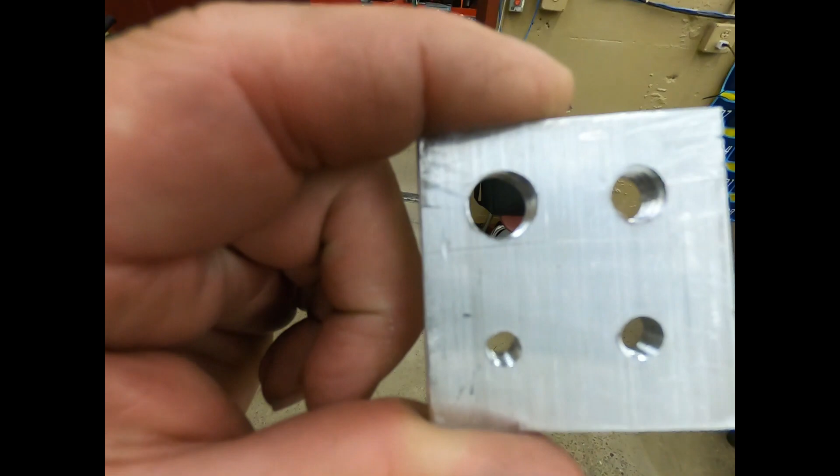You're going to put in a 1/4 inch bolt, a 5/16 bolt, a 3/8 bolt, and a 1/2 inch bolt. So the project, when it's done, will look like this. Just looks like an ordinary aluminum block, which it is. It's approximately a 1/4 inch, maybe 3/8 thick, with 4 holes, which you will be drilling, tapping, and putting threads in.

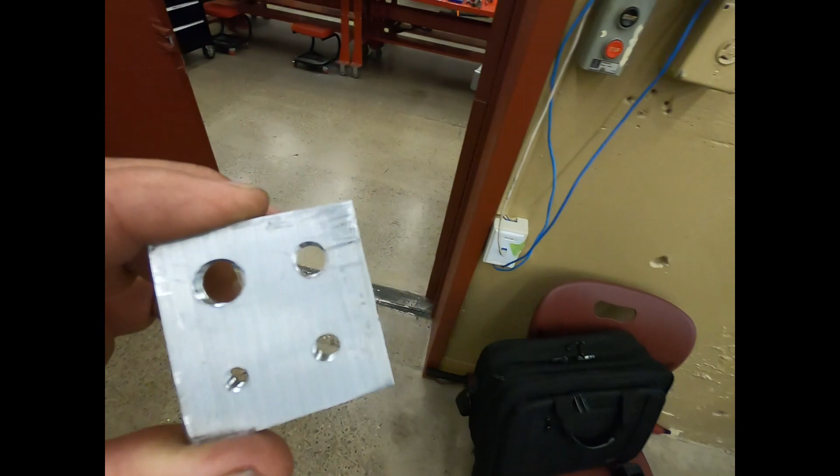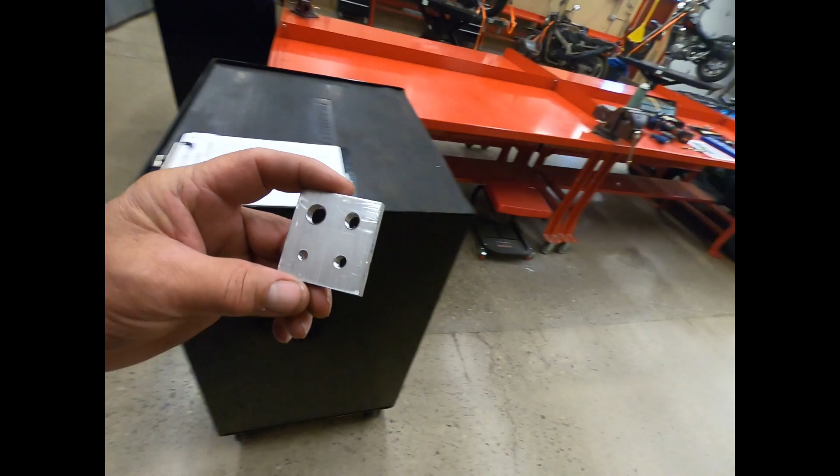It comes from a piece of flat stock, which you'll have to cut, which is right here. You'll be cutting it, shaping it, and making it look like this in the end. Now, we'll take a walk out here to the shop, and I'm going to show you the tools of the trade, the tools which you will need.

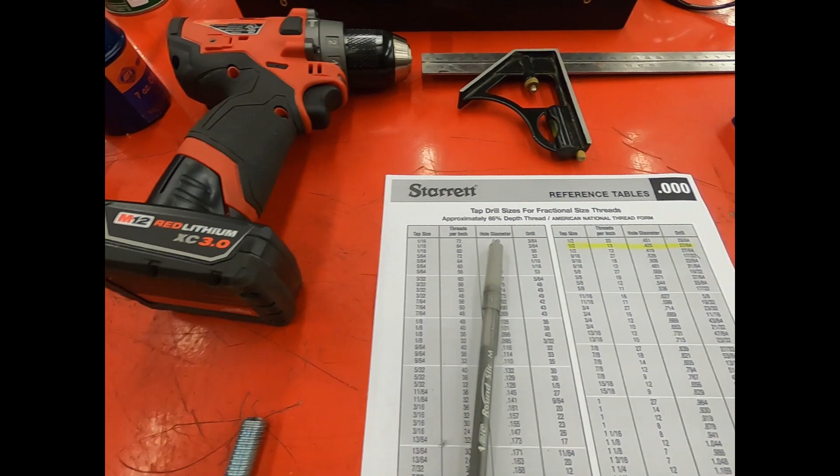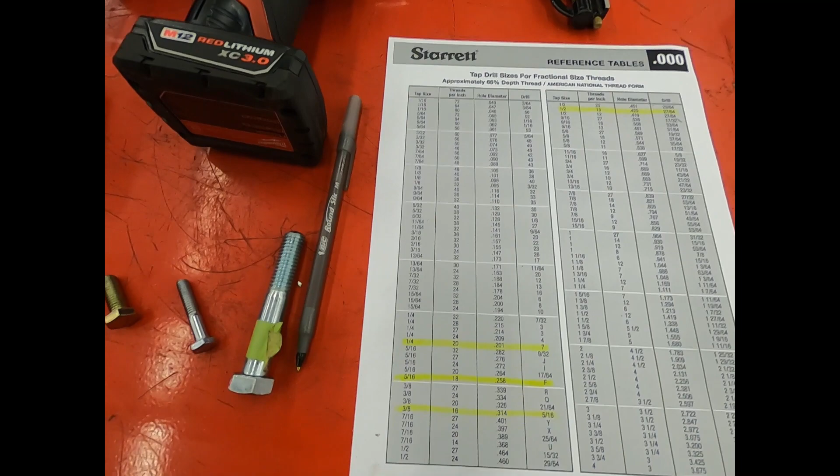Number 1 is going to be this reference table by Starrett, who happens to be one of the leading manufacturers in precision measuring equipment, drills, taps, dies. And you'll notice that a couple of these dimensions are highlighted. These are the sizes that you will be making your holes to.

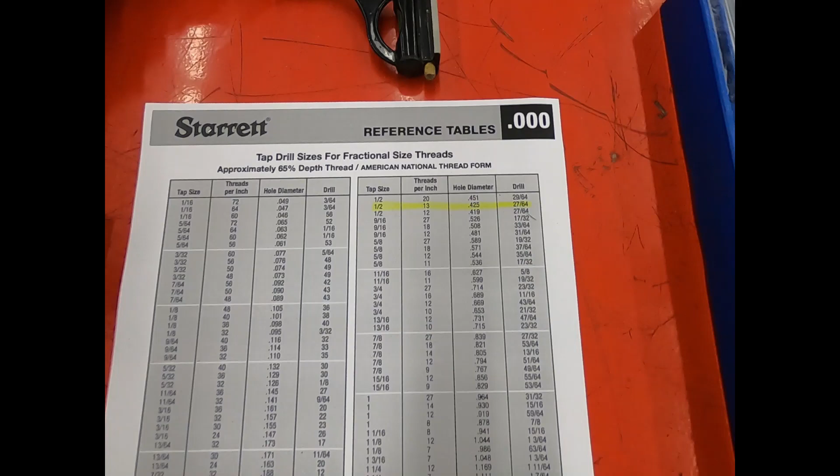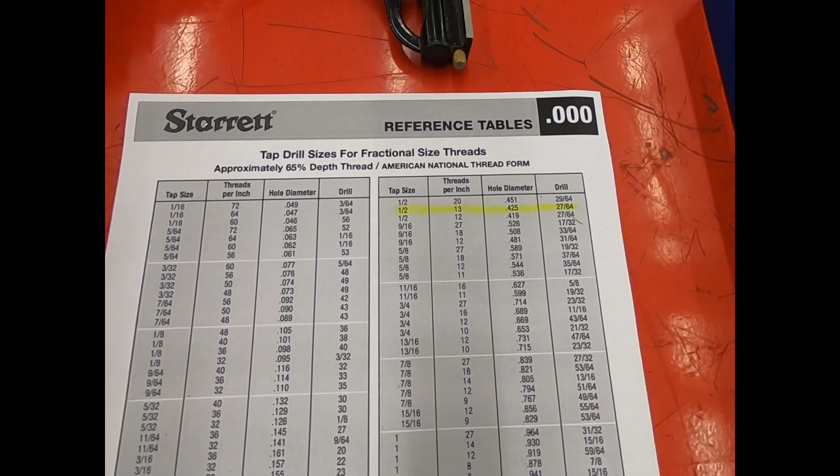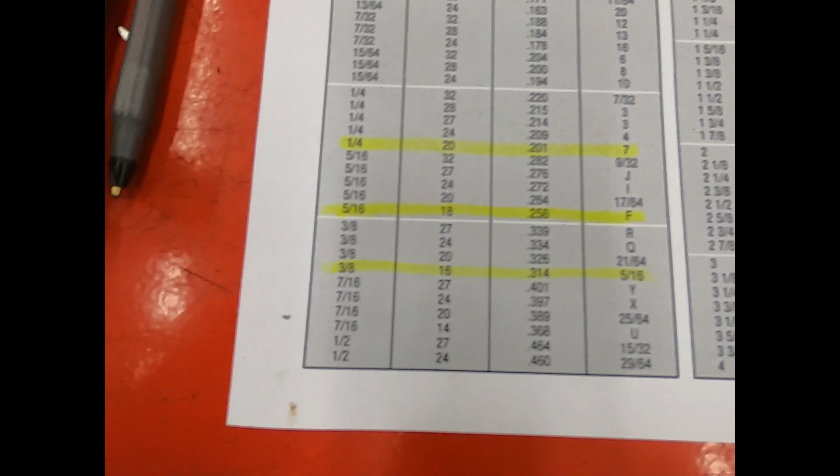Okay, there's your 1/4 20. There's your 3/8 16, 5/16 18, and 1/2 inch 13. This chart gives you not only the bolt size in the first column, or the tap size, the threads per inch, and also the drill size which you will need.

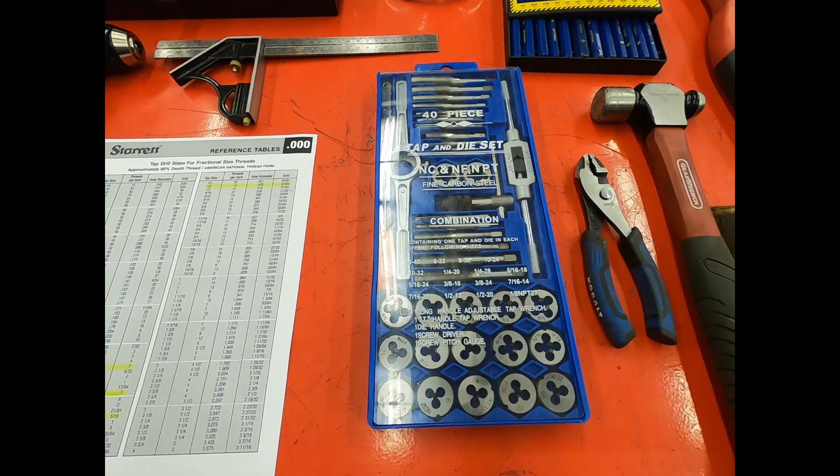This right here is our SAE tap and die set. Now you have to be careful because there's SAE and there's metric. So the question is, how do you know? Well, for one, they have the NC/NF NPT, and all the taps and dies will be fractional. If this were a metric set, they would be in millimeters.

We're going to need some basic hand tools. A pair of pliers is good to have. A hammer. This other device right beside it is called a file card. You'll see later in the video how we use a file card to clean the file, because when we're filing aluminum, the file will get all full of debris.

Okay? Probably should have put the file over there with the file card so that you know that they kind of go hand in hand. But that is your flat file, and immediately to your left will be the file card for cleaning it. If you don't have a file card, you can use a wire brush. Wire brush works pretty good. This is a center punch and chisel set. You will be needing the center punch, which is on the far left, this little one.

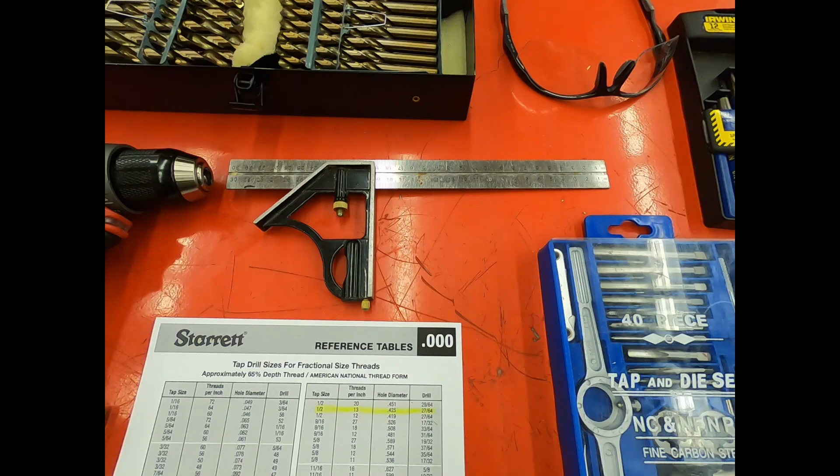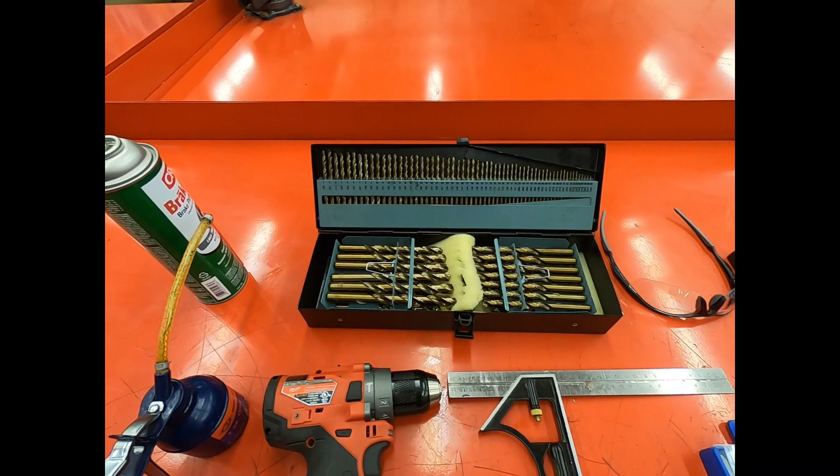Okay. Our hammer. We're going to need a combination square. That's going to be so that you can check and verify that you have good square corners. It also works as a good straight edge. Just overall handy tool. We have a 115 piece drill set. Covers every drill you should need for this job. And we're not going to make you drill them by hand. There's an actual battery powered drill

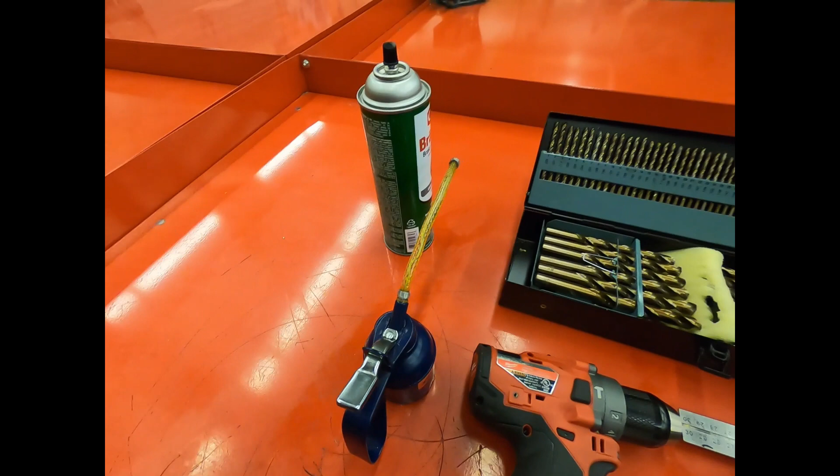to help you out. We also have oil. We're going to need oil for lubricating the threads while we're cutting our threads into the aluminum. I keep a can of brake clean handy in case I need to clean the oil off when I'm all done. And of course we have our 4 bolts that we're going to use for this project.

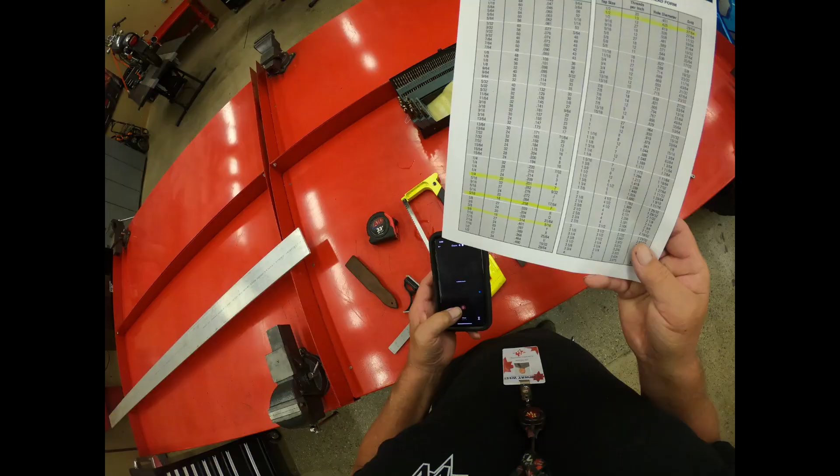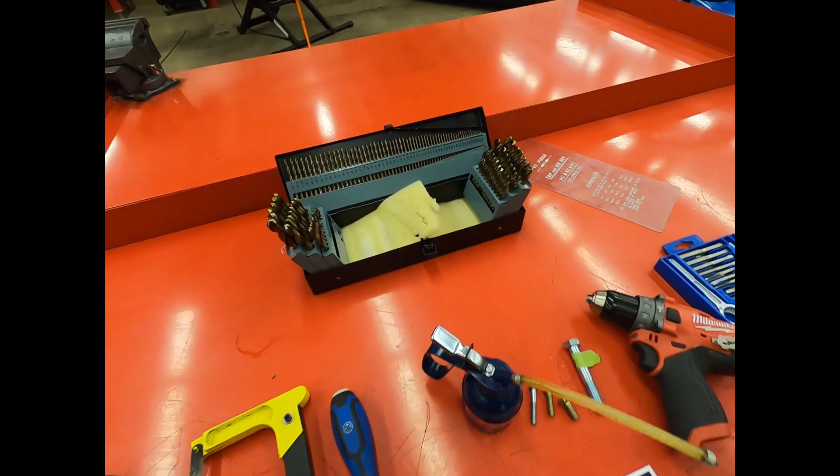Okay, so we're going to start this video by going over the basic things we're going to need for this project. Obviously, this is our 4-inch aluminum that we'll be cutting down into 2-inch strips. Some of the tools that you will need for this job will be a set of drill bits, drill motor, battery.

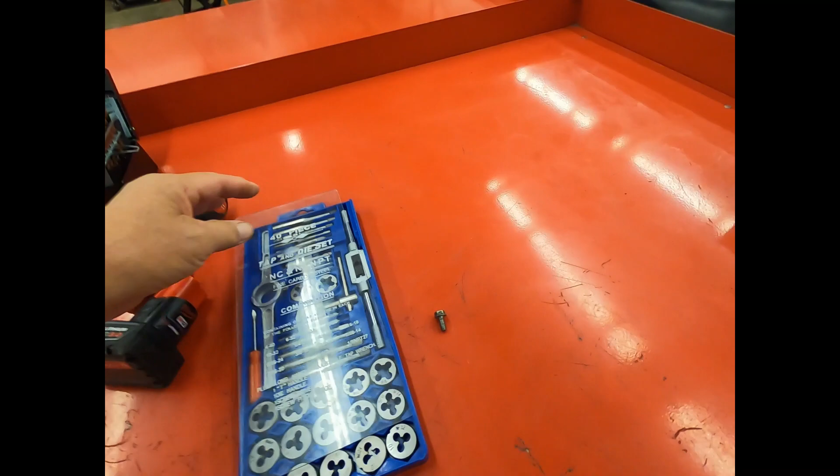You will need the 40-piece tap and die set, SAE, not metric. So you're going to have fractional sizes. That's how you know that that'll be an SAE tap and die set. Okay, we want to keep some oil on hand for lubrication of the tap while we're cutting the threads. These are our 4 test bolts that we'll be using when we're all done to ensure that we've done the holes correctly.

The first one is a 1/4-20. That means it's a 1/4 inch diameter and there's 20 threads per inch. The second one is a 5/16-18. It is 5/16 diameter, 18 threads per inch. The third one is a 3/8-16. 3/8 diameter, 16 threads per inch. And last but not least is going to be our 1/2 inch 13. So 1/2 inch diameter, 13 threads per inch.

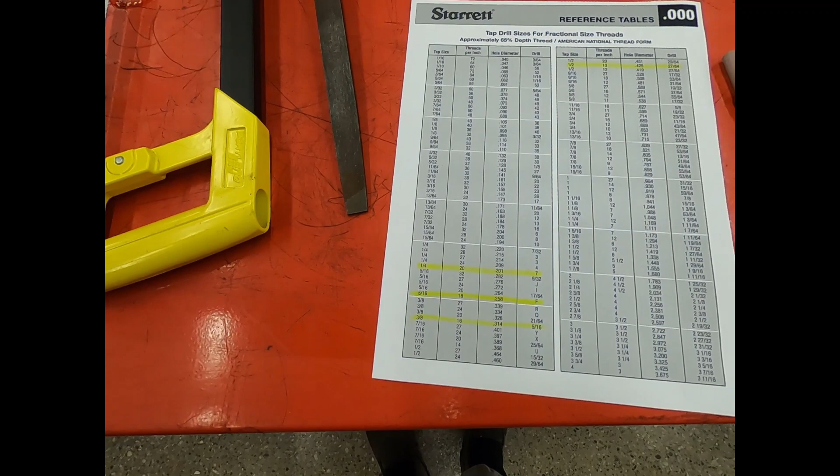And if there's any question about what you're going to be doing, the whole thing is right here on this chart. They'll be highlighted in yellow, the different bolts that you'll be drilling for. Okay, continuing on.

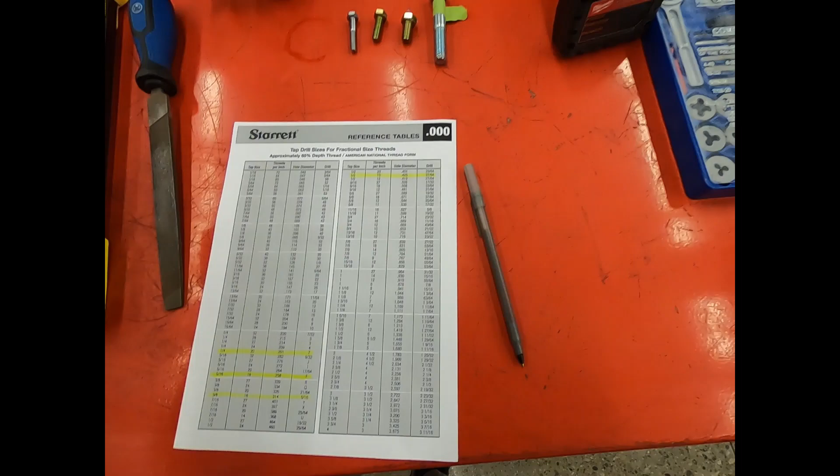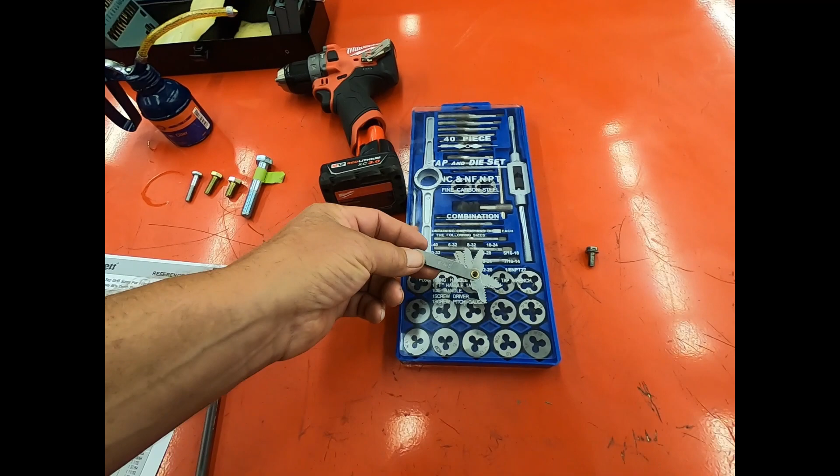Within our tap and die set is a thread pitch gauge. Very handy for determining that we have the correct bolts and whatnot for what we're doing. You will need a file for squaring up the edges of your block as shown in the previous video, because I don't want any sharp edges on there when we're all done.

You'll need a hacksaw to cut the piece of material, and this combination square we'll be using to ensure that you have nice square corners on the material which you're working. Obviously we'll need a tape measure. The combination square will work.

Another thing it's not a bad idea to have, this is known as a file card. When you're filing aluminum, the teeth on your file are going to plug up with the aluminum because it's a real soft metal. So we'll want to keep a file card on hand or a wire brush, and occasionally you'll have to clean those teeth. That is the basic tools that you will need to get rolling here.

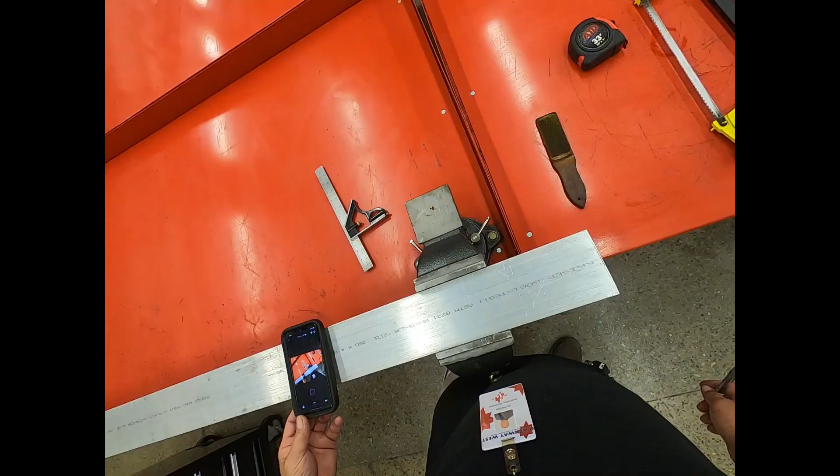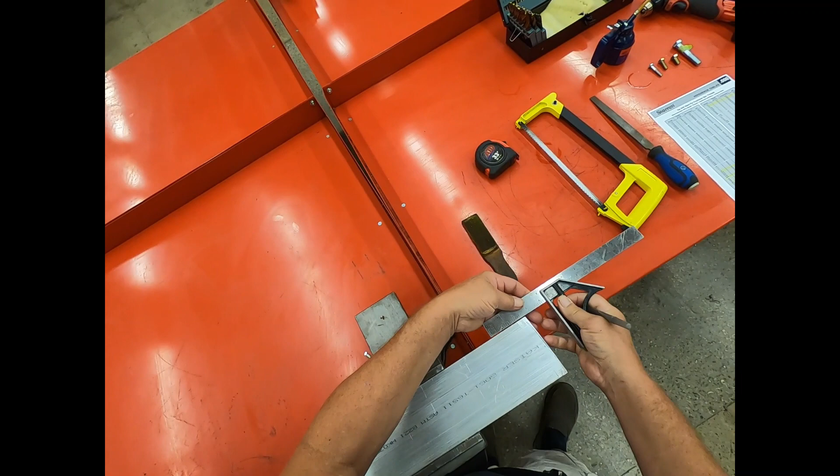Okay, step one, we're going to put our piece of aluminum in the vise. You don't want too much of it sticking out beyond the edge of the vise, because as you cut, you'll see that it'll vibrate and it'll make a lot of noise. It gets real annoying and it's just harder to control. So we put our piece of aluminum in the vise. We can either use a tape measure or we can use our combination square, and we're going to mark it at 2 inches.

Then we're going to draw a nice square line. That's going to be our cut line. I don't know how well that's going to show up on the camera, but this is going to be our cut line. We're going to cut this piece off, then we're going to turn around and we're going to mark 2 inches from the end. And I'll make it easier. Okay, 2 inches from the end. And we're going to use the straight edge here of the combination square.

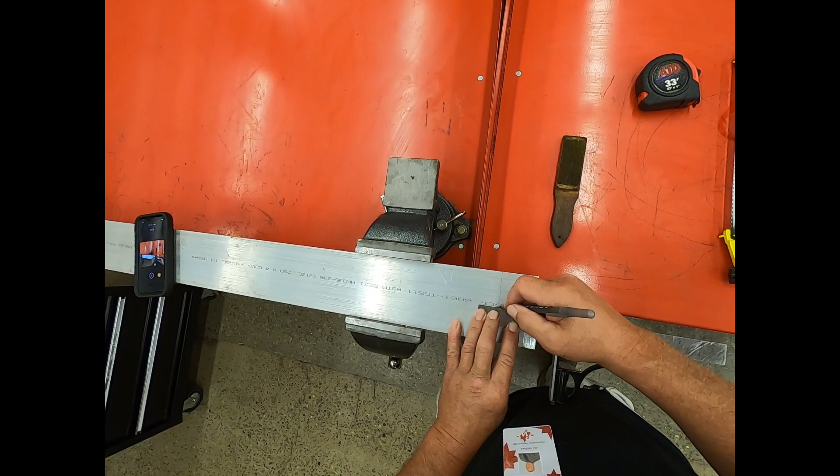What this is going to do is give us 2 perfectly 2 inch by 2 inch blocks when we're all done. I like to tell everybody the first one is for practice and the second one is for perfection. As you can see, whoever cut this the last time didn't do such a good job at squaring things up.

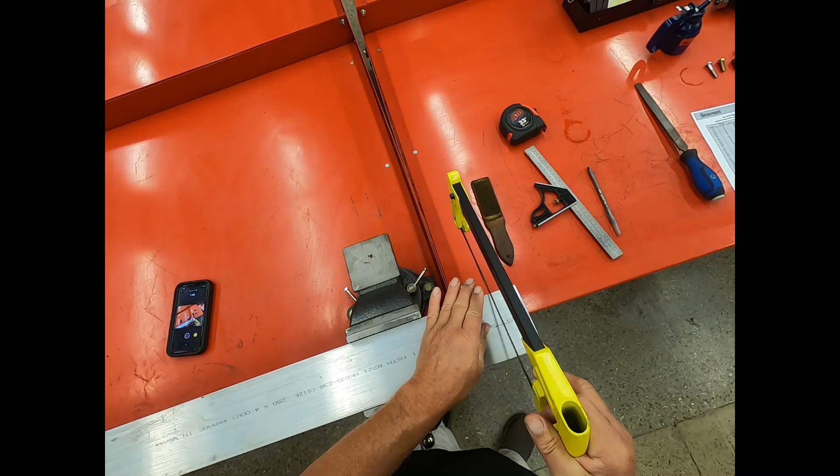Okay, now that we have our initial layout here, we're going to take our hacksaw and cut just to the line; you don't want to take the line off. You want to leave the line on if you can. And we're going to start to cut. Take your hacksaw and do a couple back drags. That's going to put a little kerf in there, and that's going to help keep your blade in it. And then we start cutting. Notice my finger is on the side of this hacksaw and my other hand is on the other end of the blade. That's going to help for stability.

When you cut, if you cut in this angle, you're not going to be very accurate at following your line. If you lay the saw down like this and go at a nice even pace, you'll find that you can control the saw and the cut much better. And in the end, you'll have a better result. Now this takes practice for some of you. This is why we're making 2 of them. But you just have to take your time, not too much pressure on the saw. Occasionally check your line.

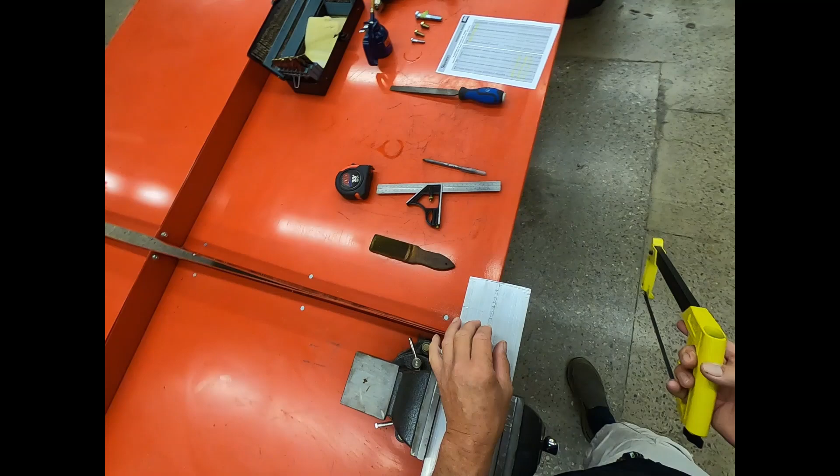Then you'll cut that off. And then I'm going to cut this off too to square it up where somebody else did a bad job. And then after I cut that, I'm going to do the same process, but I'm going to cut this line. And this line I'm going to cut right down the middle. That will enable us to have even sized pieces.

Okay, so my first piece I've cut down to basically a 2" by 4". And as you recall, we put this line in the middle. Now I'm going to turn around, I'm going to cut this in half. So in the end, I'm going to wind up with 2 pieces, 2" by 2". So again, a couple back drags with the saw. This time we're going to be centered on the line. And we're going to cut this just the same, taking our time.

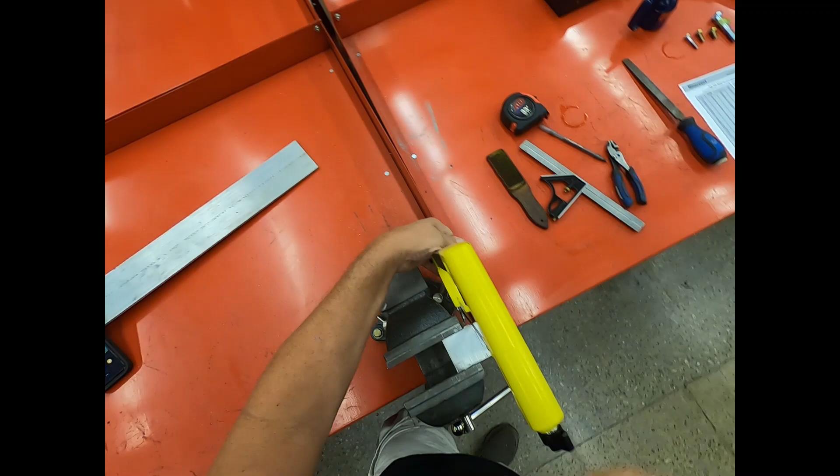Keep our saw laid back on an angle so that we can control it better. Remember, not like this - if you cut like this, it will be very inaccurate. You'll wind up with a cut that'll come down to the side, either going right or left. So keep her laid on her side with nice, even, full strokes. That's how we'll get that cut into 2 pieces.

So the next part involves basically just smoothing these rough edges off. After we're done with the hacksawing, we're gonna have a rough finish there, and we don't want that. So we're gonna take our flat file and keep going across this to make it a nice smooth surface. We're gonna do this on any of the sides that we cut. If a side wasn't cut, like this one here where it was extruded, we're not worried about that. But anywhere we cut, we're going to take the flat file and make it real nice and smooth.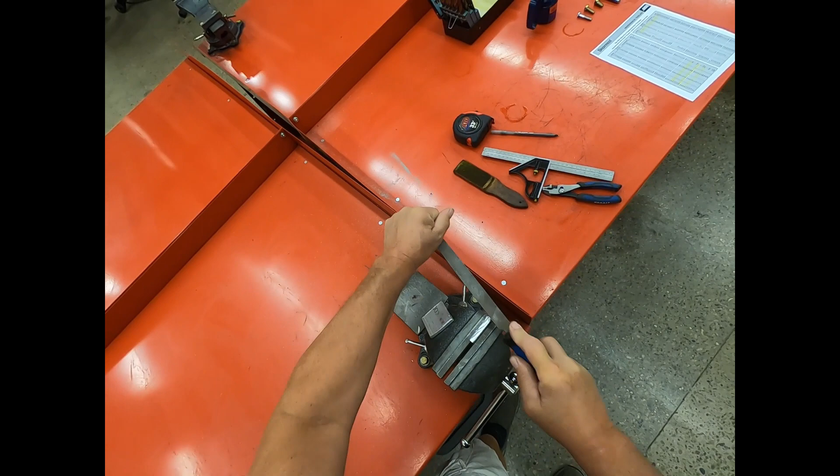You're just going to keep running over it like this, and if you got a good cut, you won't have to spend a lot of time doing this - it'll square up right away. As you can see, that's all getting to be a uniform texture and color and finish, and that's what you're looking for. I don't want to see any divots or nick marks in it or anything like that.

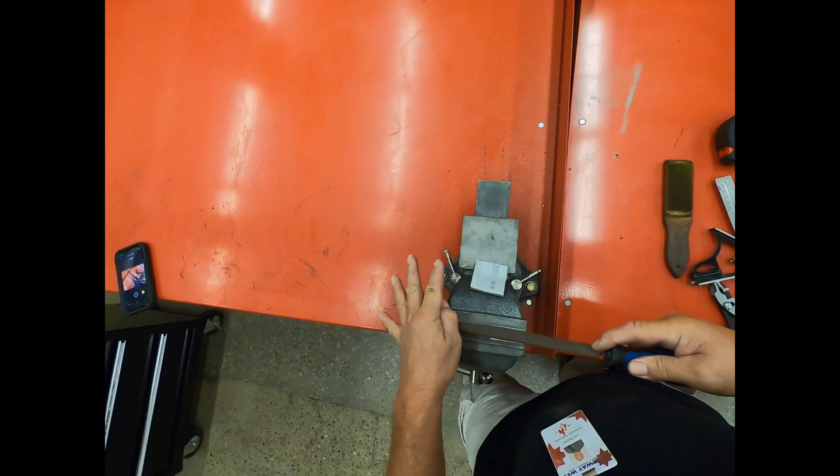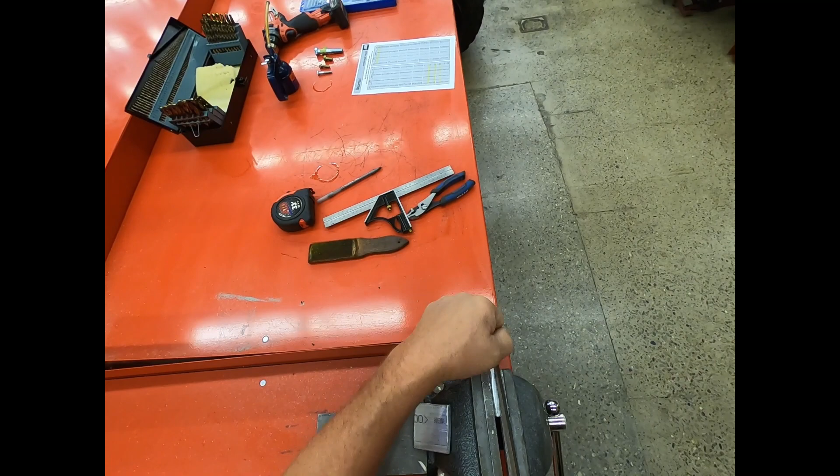So once we do that, we have to round off our edges because we don't want anything sharp that might cut us. Okay, same goes for this one - no sharp edges.

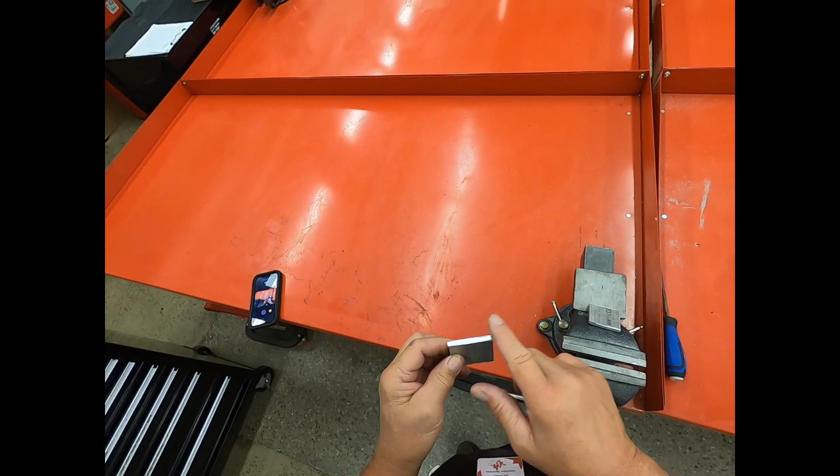So we want to do that to all 4 corners. Nice, no nicks in it, nothing terrible.

Then the other thing we want to do is check it and make sure that it's square. So we're going to use our combination square and hold this up just like so. If you hold it up to the light, or anywhere there's a reflective source behind, you'll be able to see that this is not exactly square - you can see that little area right in here. So I'm going to have to file that more until it's square. However, this little divot down here may be interfering with us, so let's remove that real quick - we may actually have a square corner.

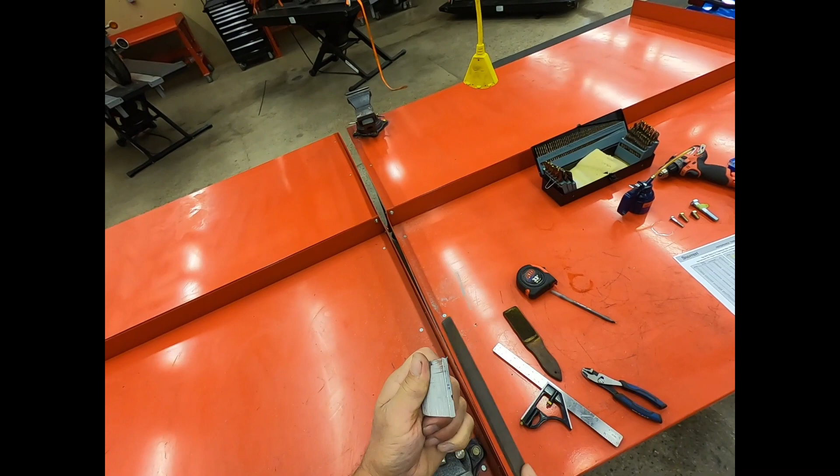Let's check it again. Yeah, it looks a lot better now. So we want to take our file, clean these all up, no sharp edges, nice finish, and we're gonna make 2 of these, perfectly square.

Okay, so I've been filing for a while here on this one, and it's just not cleaning up. It just seems like no matter what, I got rough surfaces there. And here's why - here's all your aluminum, you can feel that on your file. When your file gets like that, you can either use a wire brush or a file card, and you just take all that rough edge off of there.

Now when you go back in and start filing, you're going to get a better result. You can immediately see it starting to shine up because you're getting all that rough stuff out of there and getting a smoother finish. There might be a lot of it, so you might have to keep doing this, but this will get you to a good finish a lot faster.

And again, we'll round these corners so that we don't have any sharp edges.

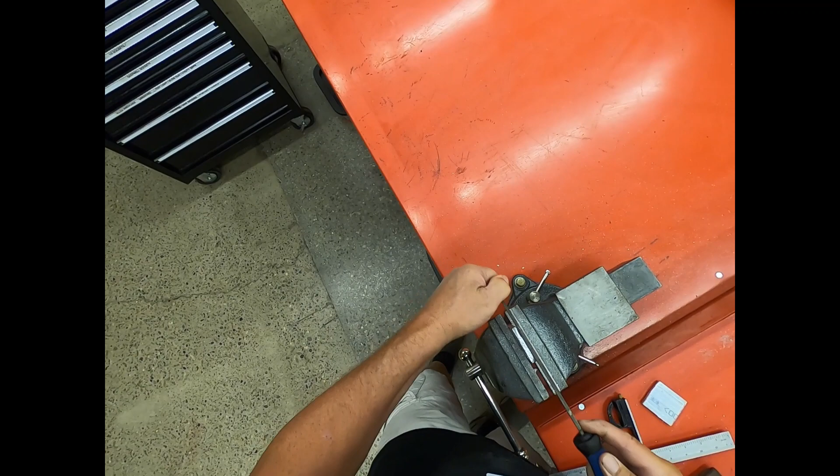And in the end, we should be left with something that looks a lot like this. Hopefully square - not exactly square. Well, we got a bump there. Pretty square. Not so square - always use this, the factory edge, as your reference. As you can see, I got a little bit of work to do there. That one's pretty good.

So we're going to keep working on that, and we're going to do this to the first one as well as the second one, because you're going to want to present to me the best of your 2. So there you go.

Okay, so now I have what should be the perfect square. No matter where I go on here, I should get a nice square edge.

Okay, my next move is we're going to prepare this block to put holes in it. So we're going to need our pen, we're going to need our combination square. We're going to put our block in the vise, and we're going to draw an X on it. We're going to lay out our combination square from corner to corner, and we're just going to draw an X.

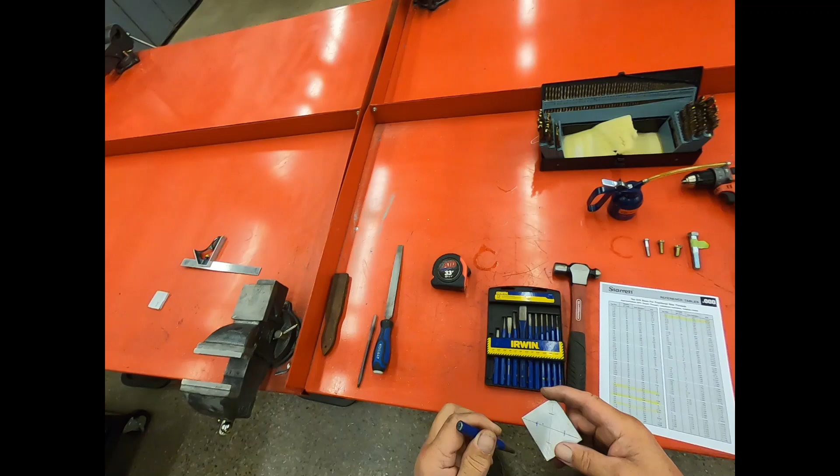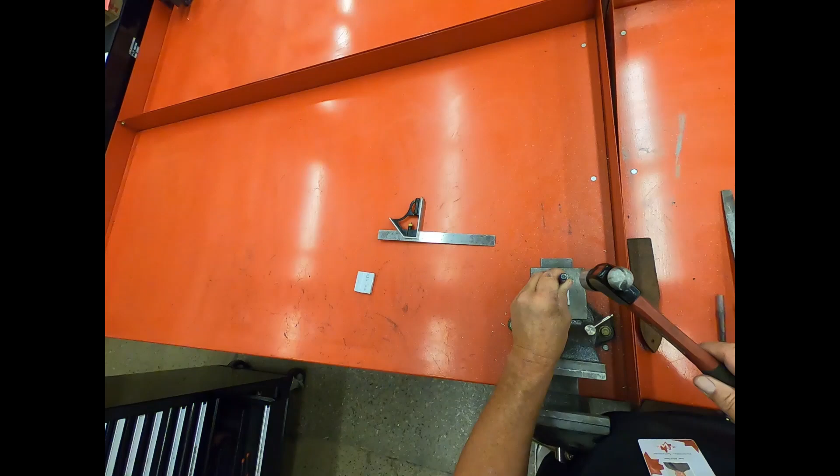Now, you need to have this on a good solid surface before you do your center punching. So we're going to put it right on the back side of the vise here, right on the anvil section. And we're going to take this point and we're going to put it right smack in the middle of those crosshairs. Okay, we're just gonna take our hammer and one good hit. We're gonna do that to all 4 of these intersecting points.

You can hit it once, you can hit it twice, but just make sure you hit it in the same spot. Those will enable us to get our drill started correctly. Just like that. Okay? Next move, we'll be drilling holes.

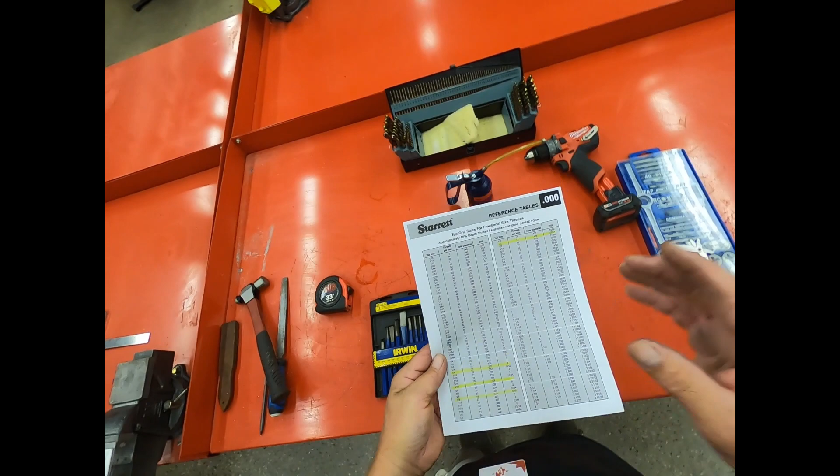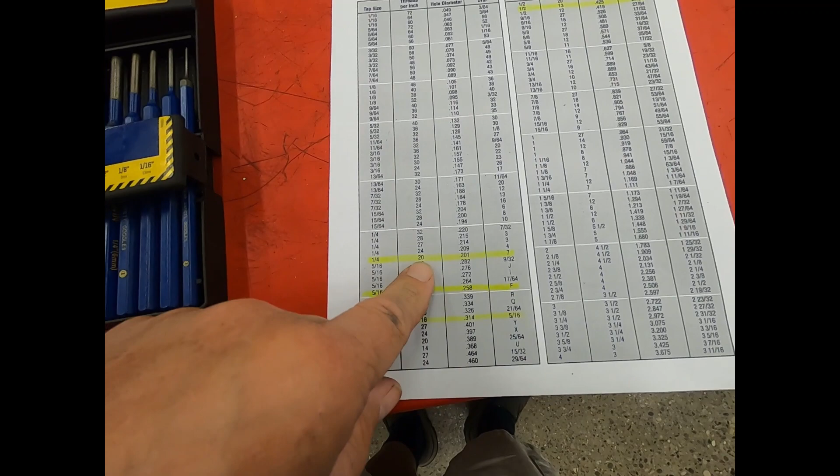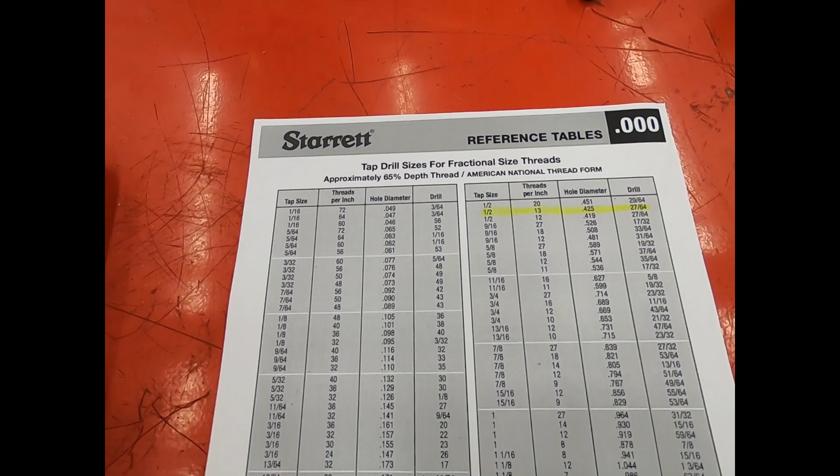Now, if you look at this chart, I'm going to take the camera off my head so I can get a better view of it, and so that you can get a better view of it. You will see we're going to start out with our 1/4 bolt hole. Now, if you look across here, that recommends a number 7 drill bit. Okay, up top is the drill size. We're going to use a number 7 drill bit. So we're going to come up here and we're going to take our number 7 drill. We're going to put that in the drill.

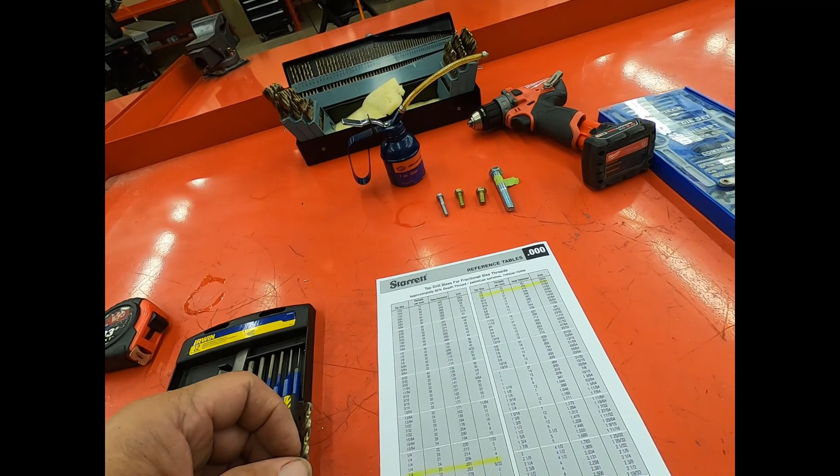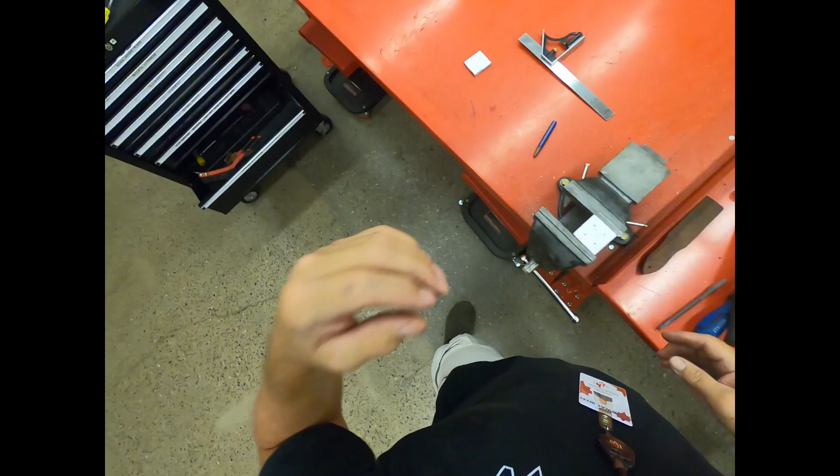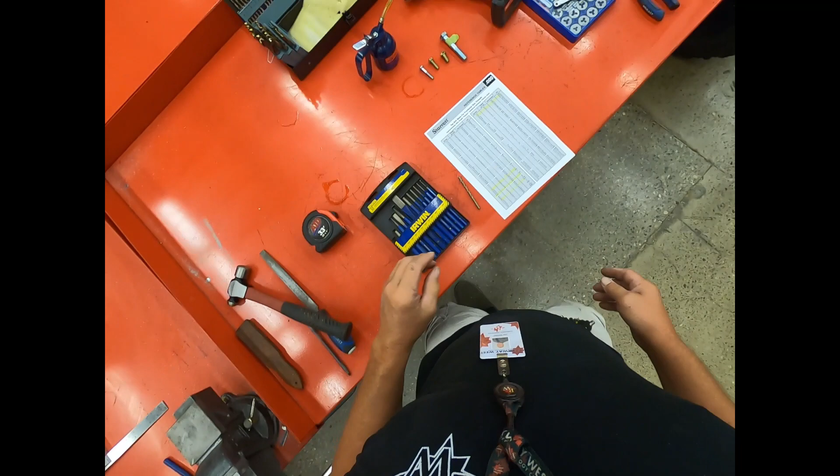And what I'm going to do, being this is the smallest of the holes, I'm going to drill all 4 holes with this drill bit first. So let me put my headband back on. Make sure that I'm viewing correctly. Okay. Take my drill, put my freshly charged battery in it, put my drill in. Now this is a keyless chuck, so you can tighten the drill bit by hand.

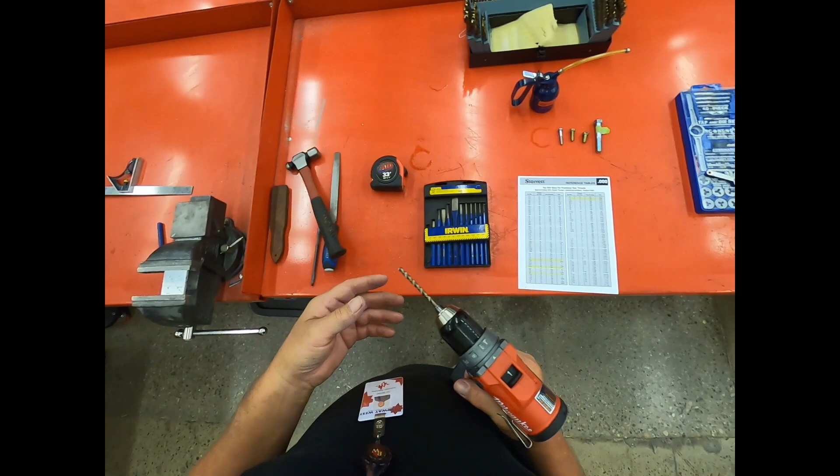And this is aluminum. Aluminum tends to plug up drill bits real quick if you drill very fast. So we're just gonna drill nice and slow right on our center punch, and we're gonna start with all 4 of these. We're gonna drill them to a number 7 drill. Keeping the drill nice and straight. We don't want our hole going crooked. Okay, we're gonna drill all 4 holes like that.

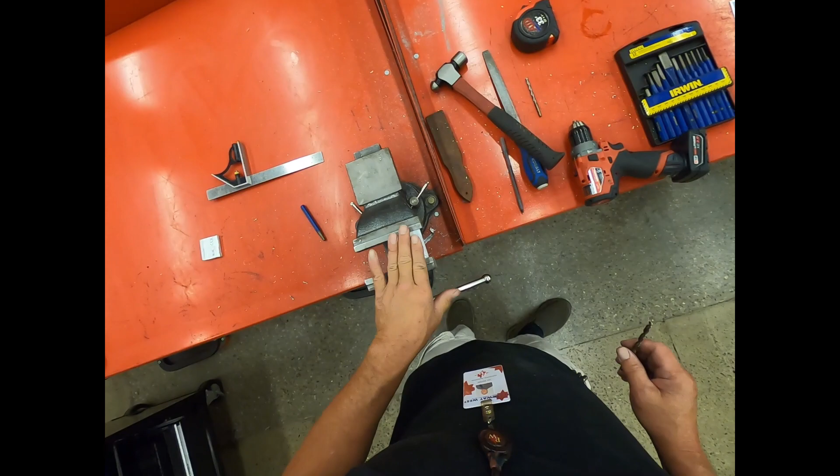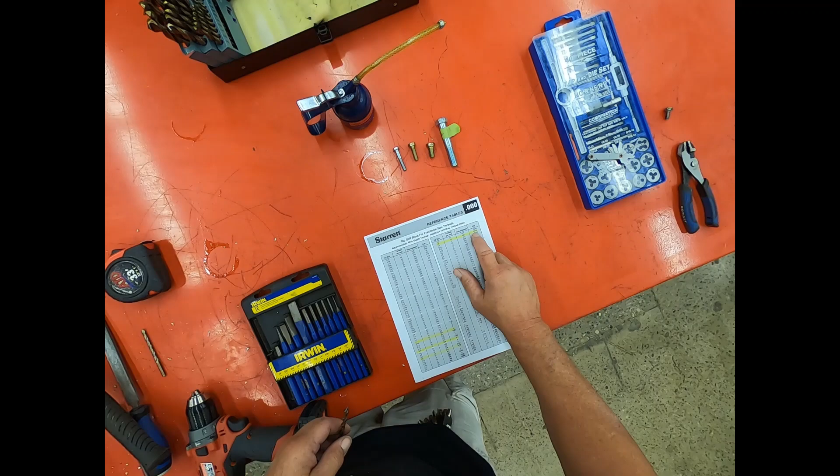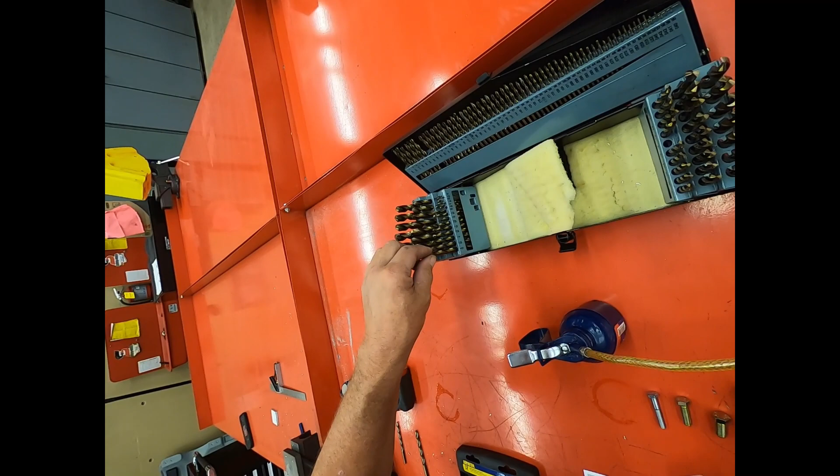All right, got my 4 holes drilled with a number 7. That's the smallest drill bit we're gonna need. If we look at the other ones, we're gonna need a letter F, we're gonna need a 5/16 drill bit, and we're gonna need a 27/64. So here's my letter F. Next we need our 5/16, which will be right here. And the last one will be a 27/64, which happens to be right here.

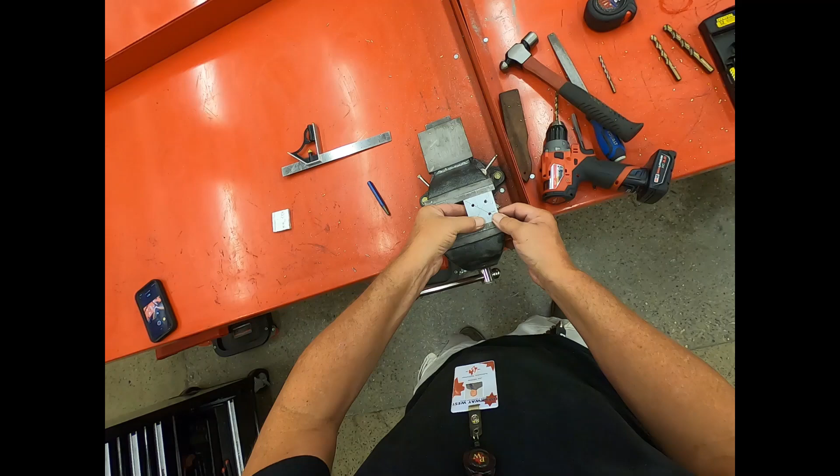Now, this is our first hole, okay? Right here at about the 10 o'clock position. That's gonna be hole number 1. The next one, we're gonna drill to our letter F drill. Okay, again, make sure that your block is level in the vise, because if we have it off like that and we drill straight, we're going to have a crooked hole. So we want to make sure that our block is level there, or as level as possible. The more time you put into it, the better result you'll get.

So this one we're going to drill a letter F drill bit. Just like that. The next hole is going to be for the 3/8, and we're going to use a 5/16 drill bit. So this is our first one, second one, third one. Now, a little advice: the aluminum tends to bite the drill bit, so be ready when it hits the aluminum. It's going to want to cut right through it. So apply light pressure, just ease on through it.

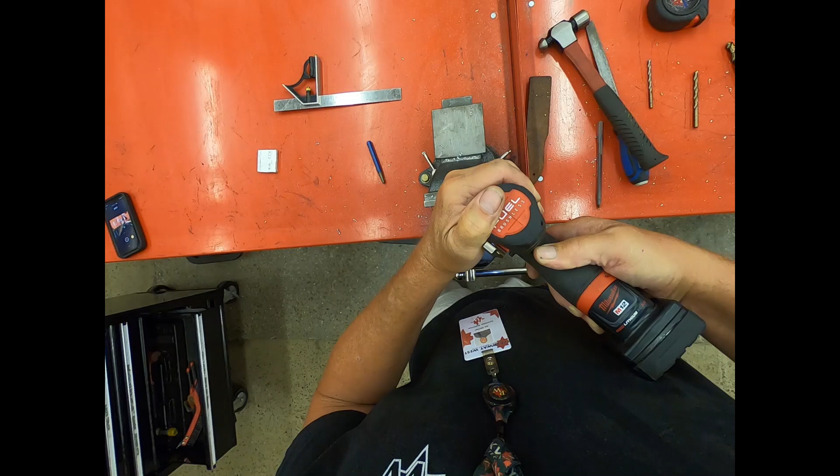And last but not least will be our biggest drill, and the toughest one probably to drill will be the 27/64. Get ready for this one. It will bite. Don't push down hard.

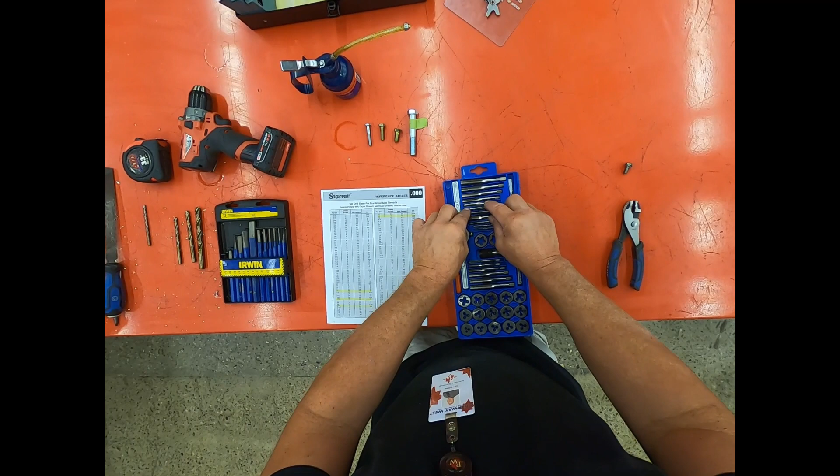Okay, so there's our 4 hole sizes, just like that. We're all drilled, and we're ready to put the threads in there so that we can start our bolt. Now, over here at our tap and die set, our first one was going to be a 1/4-20. So, on these taps, this is by the way a tap, these are dies. You want to find the one that says 1/4-20 stamped on the side.

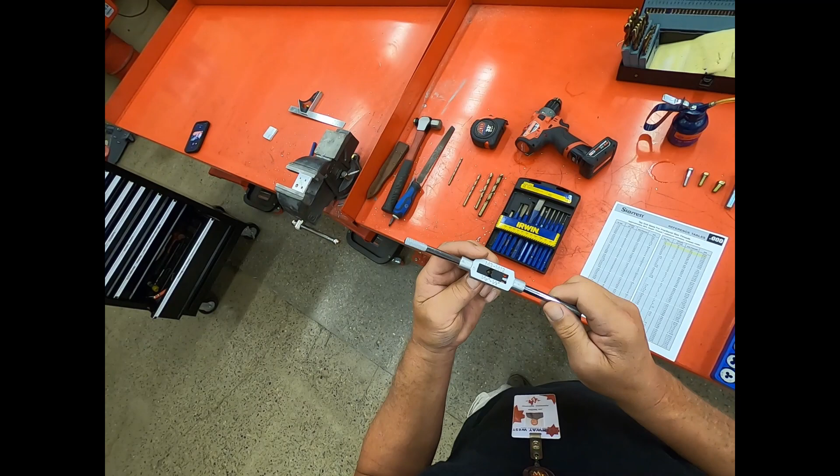1/4-20. We're going to take this, we're going to take our tap handle, which can sometimes be interesting and challenging to get out of there. So I'll use the screwdriver. We're going to put our tap in so that the square drive is engaged, and we're going to put a little bit of oil on these holes before we tap them. So a little shot of oil in the hole, not on your buddy, and we're going to carefully cut the threads in the hole.

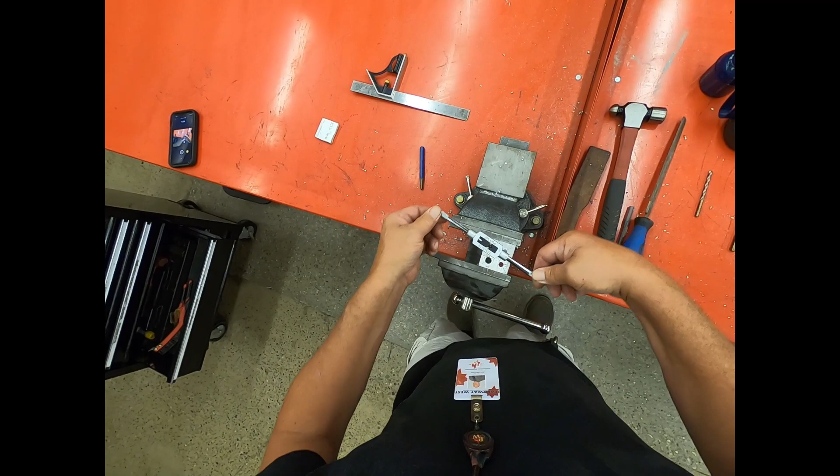Now, proper procedure once you start the tap in the hole is to run a 1/2 turn and then back it out 1/4 and run another 1/2 turn. Back it out 1/4, run another 1/2 turn. Back it out 1/4. So we're going to go through here and we're going to thread these holes, again using oil and the proper technique. By backing the tap out, what we're doing is we're actually clearing the threads up. The 1/2, back up, a 1/2, back up. You get the idea.

Okay, the tap is through the other side. I'm just going to run it through a few extra threads, just to make sure that the hole's nice and clean. Be careful when you're pulling this out that it doesn't walk off to the side, because it'll chew the threads up if it does. Okay, now you should have a perfect 1/4-20 hole there, and this bolt should thread right down in with ease. Look at that, by hand, piece of cake. That's what I'll be looking for when this is all done. You look at it from the side, it's straight up and down, it's not on an angle, and it threads in easily. So we do that for the 1/4-20.

Then we're going to move over to the 5/16-18. So we're done with this tap. We need to find our 5/16-18. This one looks like it. What do you know? 5/16-18. You'd think I've done this a little bit. All right. Put that in. A little bit of oil on there.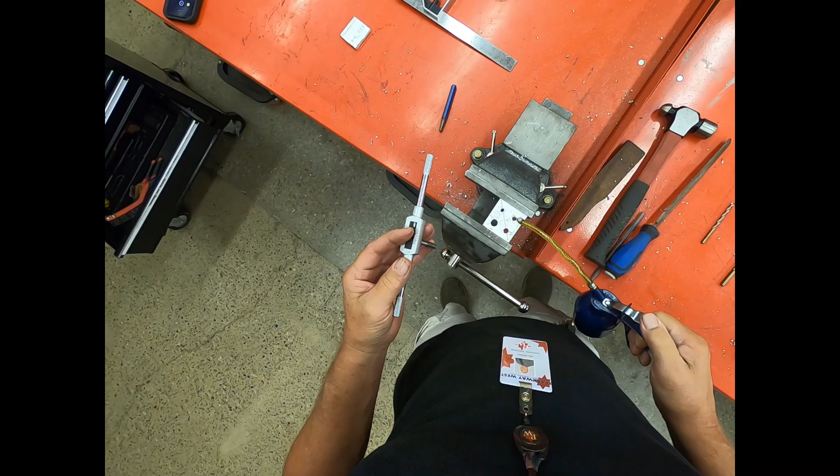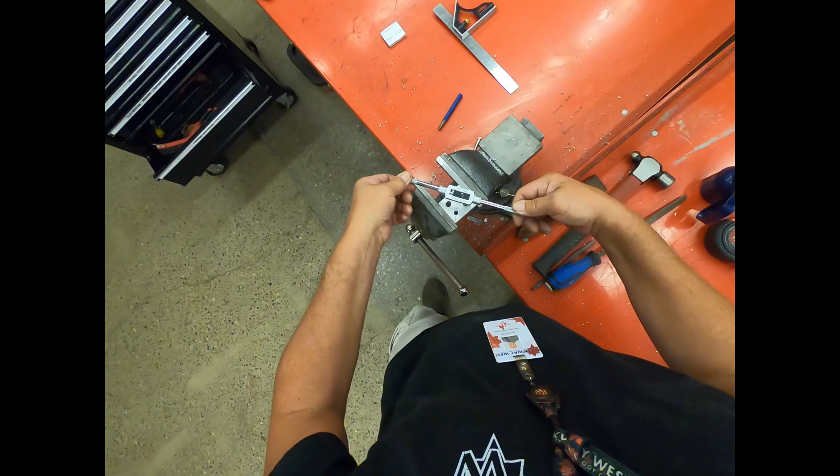I'll show you one more time, and then you'll have to go at it alone on the 3/8 and the 1/2 inch holes. Again, do your best to make sure that it's nice and level when you start. Once you know it's pulling in now, same thing. Loosen it 1/4, go a 1/2. Loosen it 1/4, go a 1/2.

One of the easiest ways to break a tap is to side load it. With the aluminum, it's not as much of a problem, but when you get into some harder steel, you'll find that if you're gonna break a tap or an easy out or anything, you're gonna do it because you side loaded the tap. Okay. Now, here's our 5/16, and right down in the hole by hand. Piece of cake. All right, I'll leave you guys to your own to do the other two, and then we'll talk about the final steps.

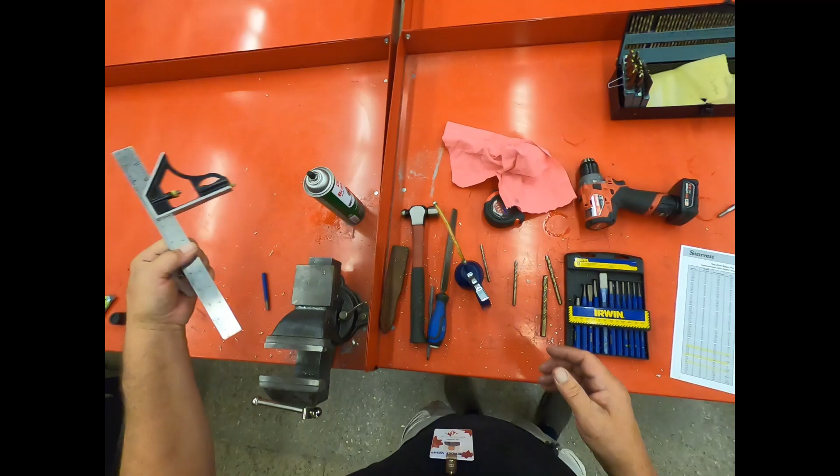Okay, so in the end, here's what we're left with. We have this nice block, and it is square based on the machined edge reference, very close to it. All right, I don't want to see anything that's like that, or just all hacked up. We're looking for a good square block, 2 inches by 2 inches, and I can easily take a 1/4-20 bolt, thread it right down in that hole.

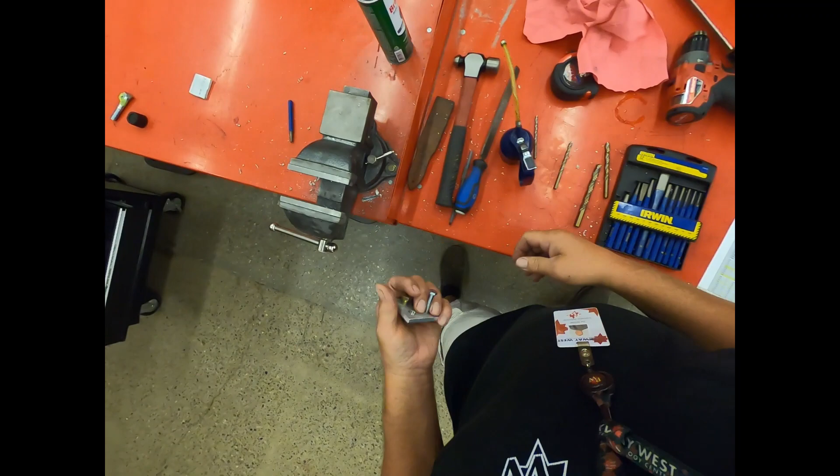I can easily take a 5/16-18 bolt, thread it down that hole. Same goes for the 3/8-16. Take that one, that goes in that one, nice and easy. And if I can figure out where I put my 1/2-inch 13 bolt, I can take this one and run it right in here by hand, nice and easy, no problems.

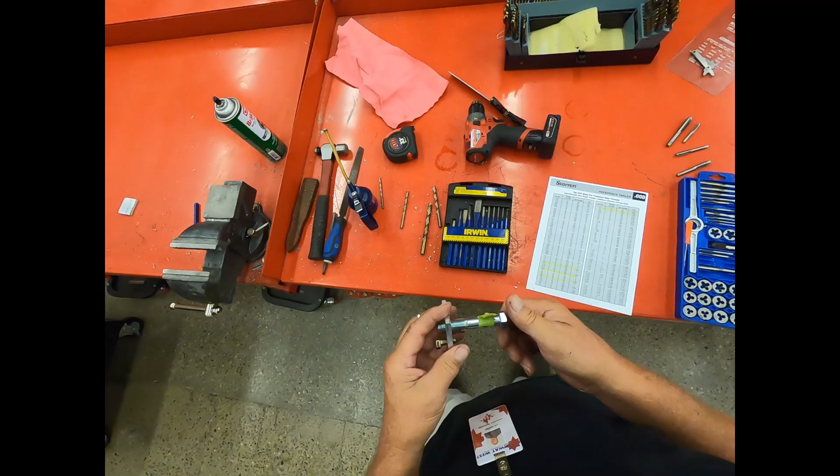I'll tell you, by using oil on the tap, the threads are much cleaner. They're not all galled up, and they're gonna give you a better result threading your bolt on in. So I'm gonna know if you use the proper techniques with the tap, making sure that it's oiled, making sure that all these are nice, at a right angle to the block. Okay, so that's your end result. This is what I'm looking for.

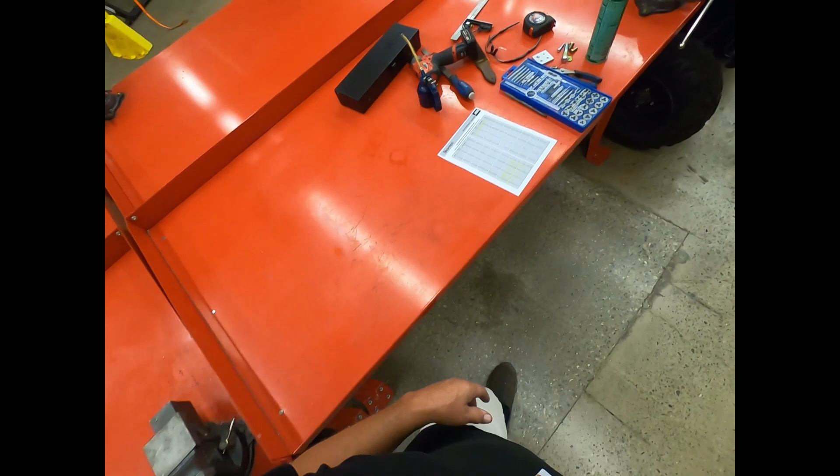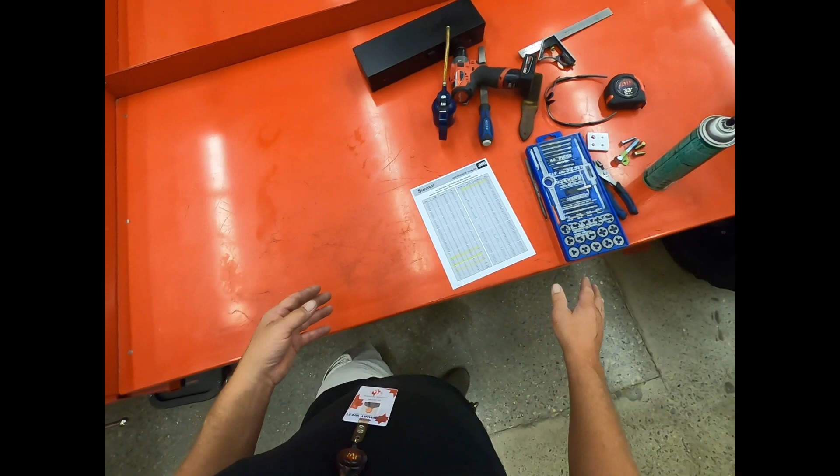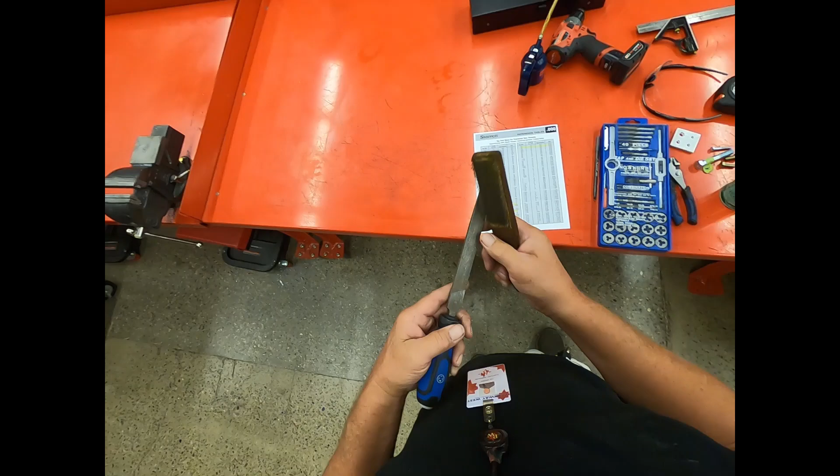And obviously, folks, we're gonna clean up our area too. So when you're all done, and your bolts fit well, and your tools are all cleaned up, that's when you'll come to get me for the grade. Okay, so when you come to me at the end of the project for your final grade, we're gonna have the benches all clean. We're gonna have our taps cleaned up and oiled. We're gonna take this file. We're not gonna leave all those aluminum boogers in there. We're gonna take our file card or a wire brush, and we're gonna have our file all cleaned up. Basically everything all cleaned up and ready to go for your grade. That's it.